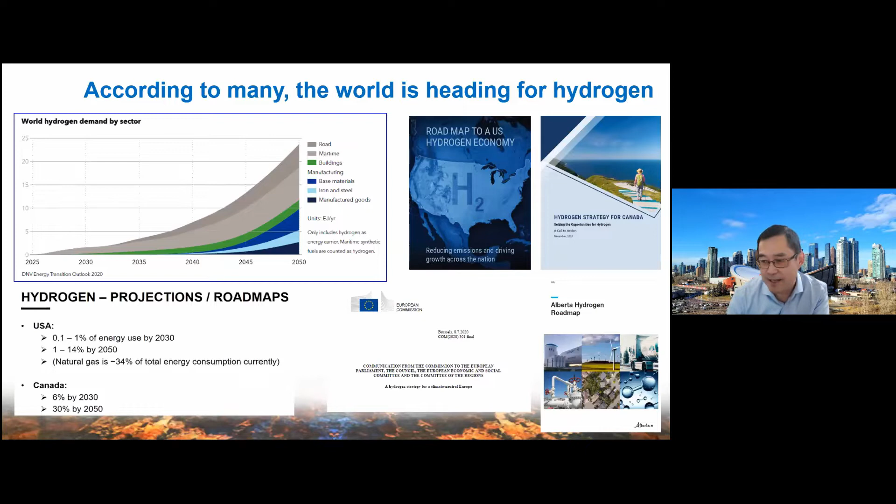I don't want to use lots of time because you can find from the internet lots of different resources, and the world is heading for hydrogen. You can see lots of data in Canada, US, and other countries showing hydrogen production and hydrogen demand are increasing. At the same time, you can also find literature related to governmental hydrogen strategy and hydrogen roadmaps - particularly our province, Alberta, also published a hydrogen roadmap.

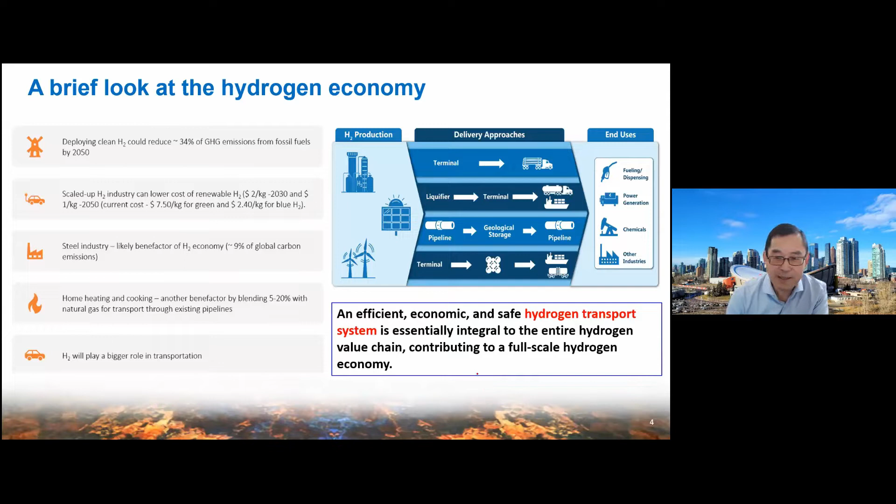In terms of the hydrogen economy, it includes 3 interrelated sections: hydrogen production, hydrogen delivery, and hydrogen use. From this entire value chain, you can see efficient, economic, and safe hydrogen transport is pretty critical to realize the full-scale hydrogen economy. Of course, as a pipeline researcher, we focus on the second stage, hydrogen delivery.

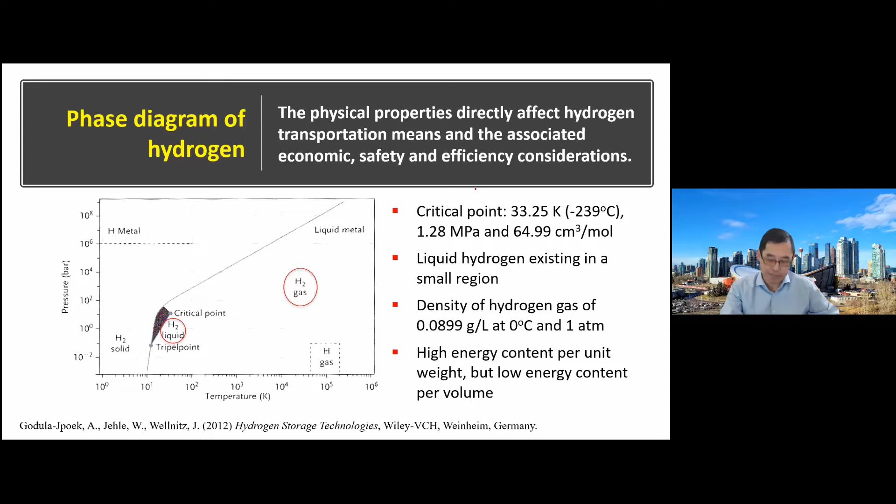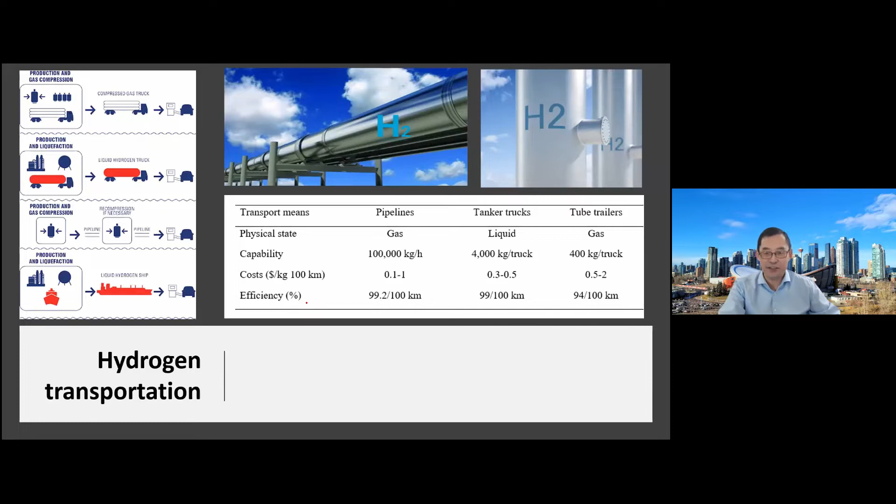Right now hydrogen can be transported by tanker trucks and tube trailers. Of course, it can also be transported by pipelines. This table lists some basic information in terms of cost, capacity, and efficiency, so you can see directly pipelines offer lots of advantages. The US DOE just issued a document stating clearly that transporting hydrogen through existing pipelines is a low-cost option for delivering large volumes of hydrogen.

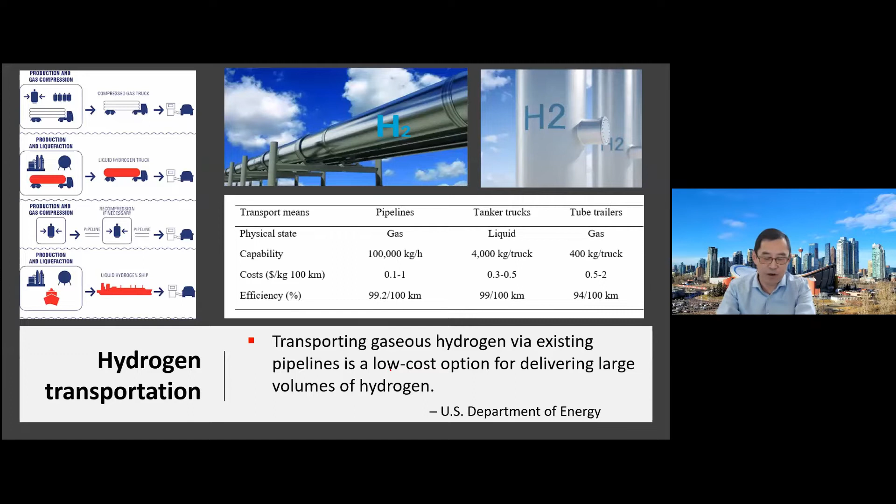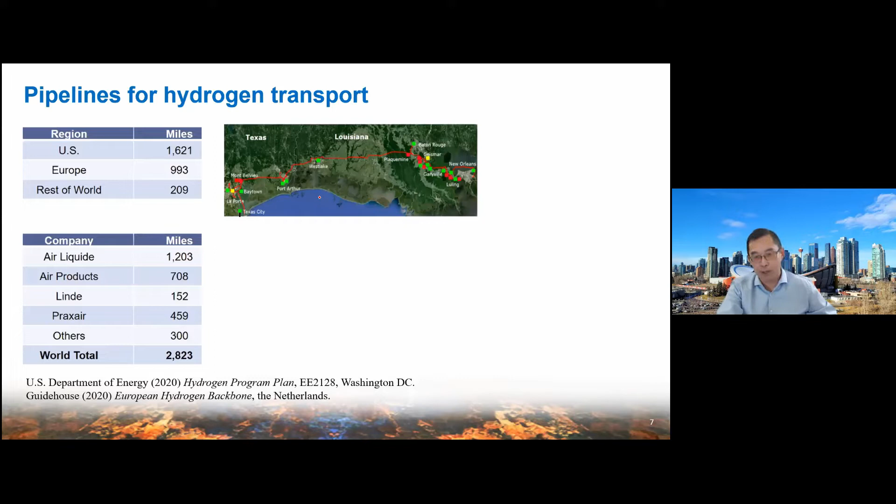Currently there is a very limited mileage of pipelines used for hydrogen service, mostly located in the US and Europe. In the United States, hydrogen pipelines are mainly located in the Gulf area - that's normal because oil production and refineries are located there. In China, there is also a very limited distance of pipelines for hydrogen service.

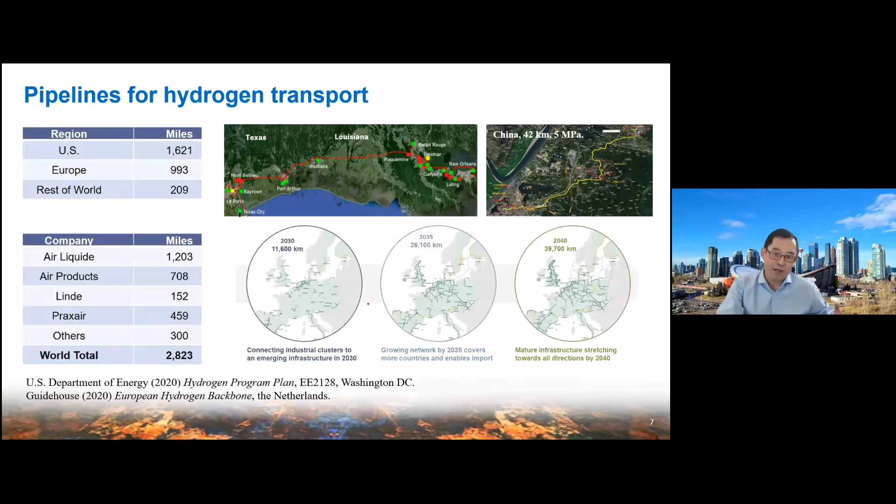But I want to mention the European initiative called the European Hydrogen Backbone, developed in 2020. It's a plan issued to develop over the next 20 years. You can see that in European countries, new pipelines and existing pipelines will be used together to target a well-developed connection across European countries for hydrogen transport.

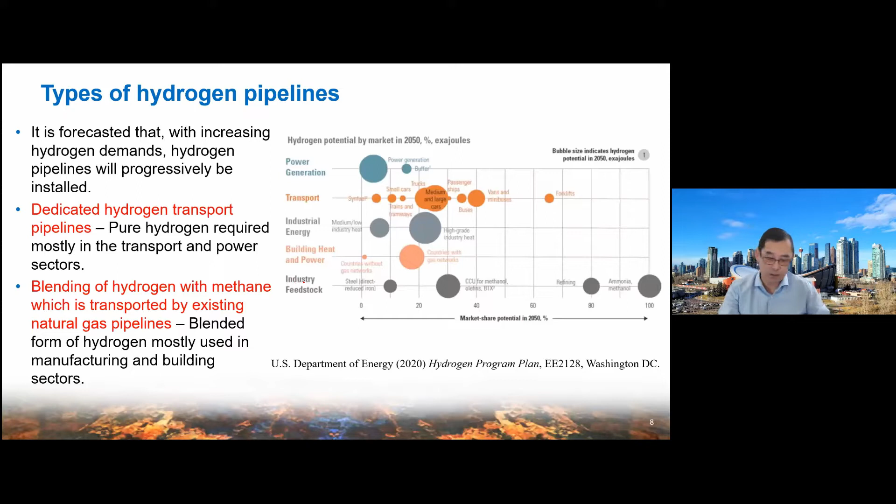But mostly the hydrogen transported by this form is used in industry. If we want to build a new pipeline for dedicated transport of hydrogen, the super high initial capital cost is a major barrier. So the industry and the government tend to use the existing natural gas pipeline to transport hydrogen through blending it with natural gas.

So if we realize this strategy and plan, I summarize 4 areas of technical challenges we have to overcome or address.

First one is the type of materials - whether the material is safe enough to transport the hydrogen and natural gas blending, and what's the optimum operation conditions. Second one is related to the blending operation and some tools - inspection tools, leak detection, something like that.

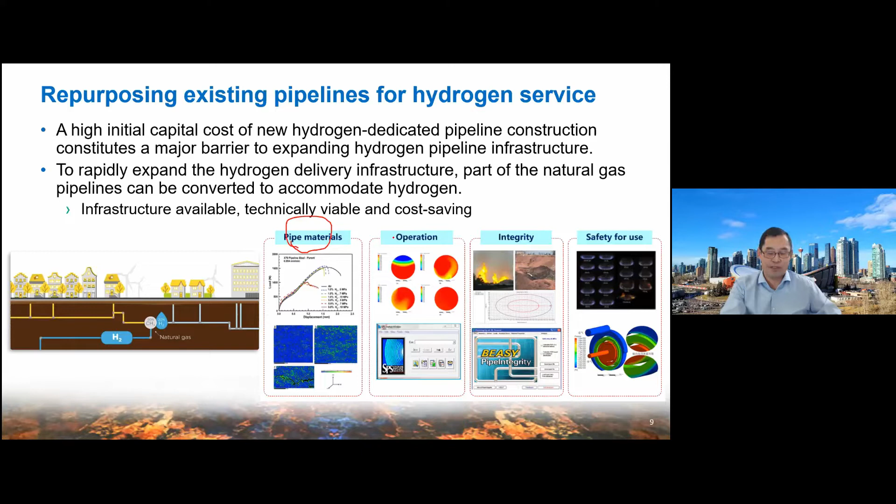Number 3 is integrity - inline inspection tools can be used in hydrogen pipelines without influencing the operation. Finally, is the safety for users. So today I will focus on the first one - pipe materials compatibility with hydrogen transport.

When we read the literature and different reports about steel used in the hydrogen environment, I believe everybody in the meeting room recognizes our problem: hydrogen embrittlement. So what is hydrogen embrittlement? This is a general term referring to the degradation of metals because of hydrogen-metal interaction.

So firstly, I want to give our first highlight in today's talk. Hydrogen embrittlement, the hydrogen means what? That means the hydrogen atom, H, okay? Hydrogen usually can exist in 3 physical forms: hydrogen atom H, hydrogen molecule H2, and hydrogen ions H+. So hydrogen embrittlement means H, the hydrogen atom.

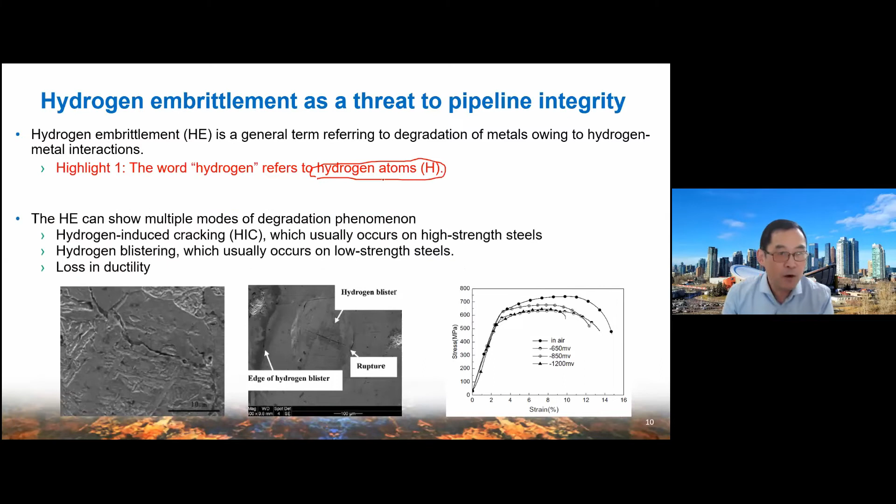After hydrogen embrittlement happens, it usually shows multiple modes of metal degradation. Hydrogen can cause cracking, we call it HIC. You can see the bottom picture on the left side, a sharp crack developed through the metal and can fail the structure. Hydrogen-induced cracking usually happens on high-strength steels.

The second mode is hydrogen blistering. Hydrogen and hydrogen combine together to form hydrogen bubbles, hydrogen gas, increasing the local pressure to cause blistering of the steel. This usually happens on low-strength steels.

Third one is very common, and you can see from the stress-strain curve on the bottom right side, it can cause a loss in ductility and elongation.

Highlight 2 in today's talk: in some literature and reports, a term we call hydrogen attack or hydrogen corrosion is also included in the degradation of metals. But I will emphasize hydrogen attack or hydrogen corrosion does not apply for pipelines, because this phenomenon only happens at temperatures more than 250 degrees. So we don't worry if we use a pipeline to carry hydrogen - this problem will not happen.

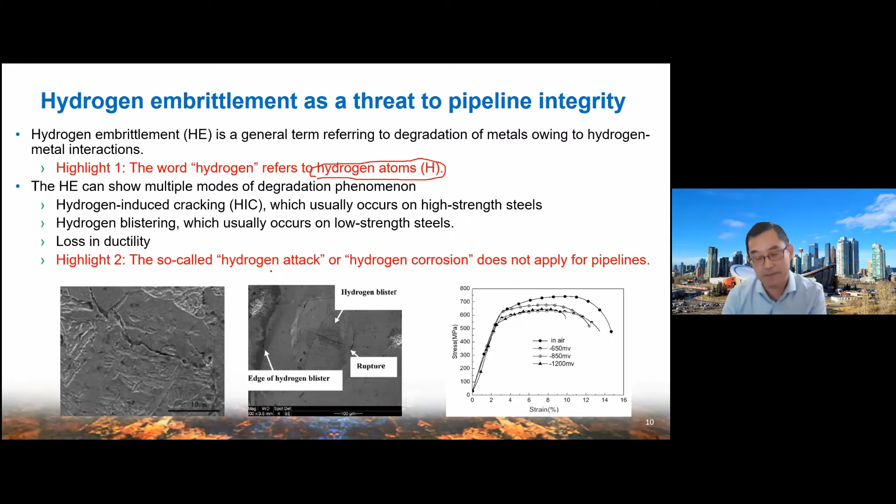Hydrogen-induced cracking is the most dangerous mode of hydrogen embrittlement for engineering structures. The cracks can form internally or from the metal surface, depending on where the hydrogen is located, to reach the cracking condition, and at the same time depends on the environment.

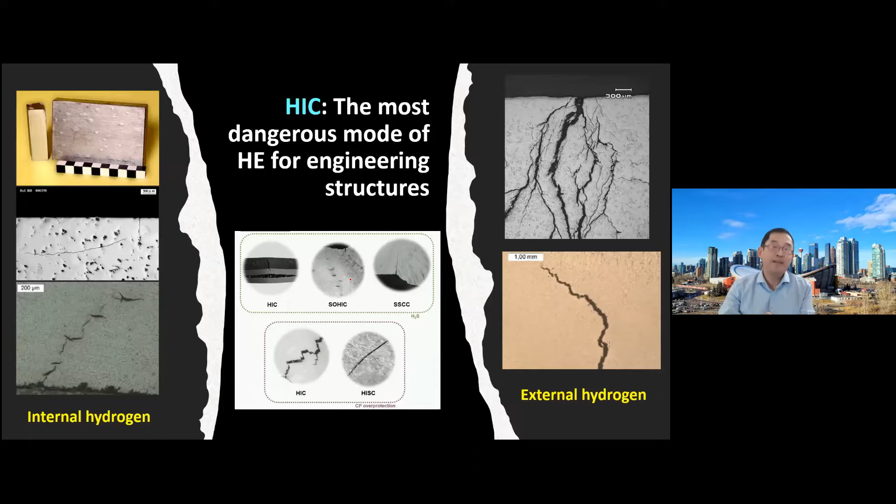H2S availability, or cracks introduced by over cathodic protection - we can also see different features of the cracks related to orientation of the stress or different phenomena of crack growth. There are lots of different terms describing hydrogen-induced cracking, but the common thing is the crack is caused by hydrogen, combined with other conditions I will talk about later.

When we talk about hydrogen-induced cracking of metals such as pipeline steel, please don't forget the pipeline is a welded infrastructure. So hydrogen-induced cracking at the welding area is particularly important. There are 3 reasons.

First one, the pipeline welding area has a unique metallurgical microstructure. You can see from the metallographic picture on the right side, the base steel, the heat affected zone (HAZ), and the welded metal - they have different microstructures. Particularly in the middle one, HAZ, in addition to F which is ferrite, B which is bainite, it also has C which is cementite. This is a hard and brittle phase that can make the hydrogen-induced cracking more sensitive.

At the same time, the welding area also has local high stress concentration. So we just used a model to simulate - at the HAZ, you can see the stress has a peak in this area that's associated with the stress concentration.

Number 3, in the welding area, depending on different conditions, there is always hydrogen accumulation. You can also see from this figure that hydrogen concentration has a peak at the HAZ and the interface between HAZ and the welded metal.

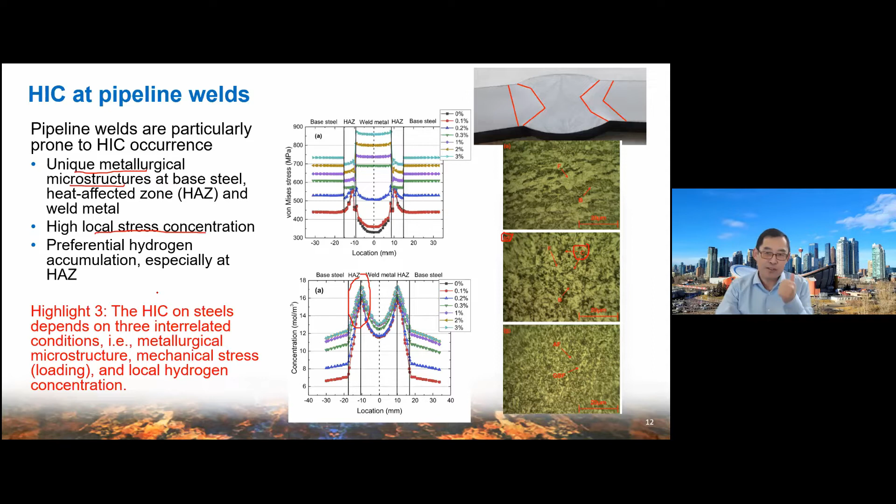So let's come to highlight 3. When hydrogen-induced cracking happens, it depends on 3 conditions: number 1, steel metallurgy; number 2, local stress; number 3, hydrogen concentration. So the welding area has a unique feature in these 3 conditions.

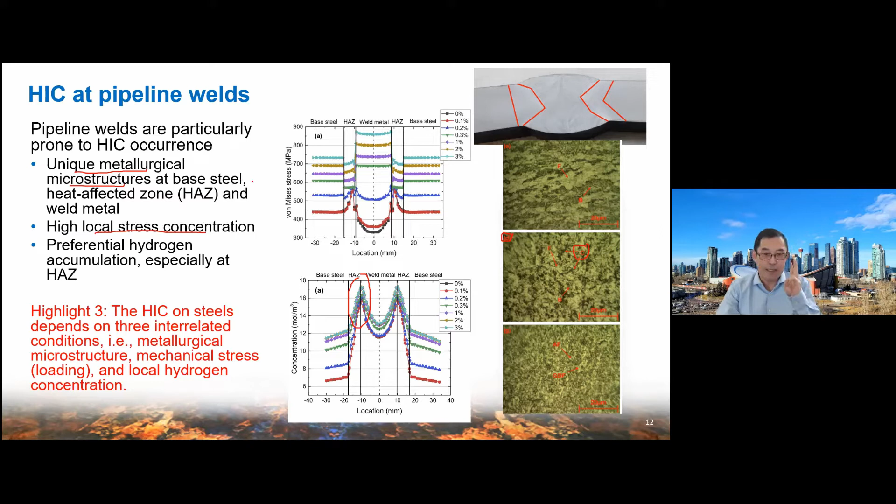So how does hydrogen-induced cracking or hydrogen embrittlement happen on pipeline steel? Usually there are 6 steps. The first one, as I mentioned in the beginning of my talk, hydrogen embrittlement means hydrogen atom induced embrittlement. So the first step is how hydrogen atoms are generated from the environment condition.

After hydrogen atoms are produced, they touch the steel surface. That's the second step, adsorption (ADS). ADS hydrogen will go inside the steel, becoming absorption (ABS) hydrogen - that's number 3. When hydrogen goes into the metal or steel, it tends to diffuse in the crystal lattice of the steel - that's diffusion, number 4.

All steels usually have typical morphological features and mechanical defects, so hydrogen can become trapped - that's step number 5, hydrogen trapping. When the stress, hydrogen, and metal structure meet the condition, finally it can cause cracking. So there are only 6 steps involved to cause cracking of the steel because of hydrogen.

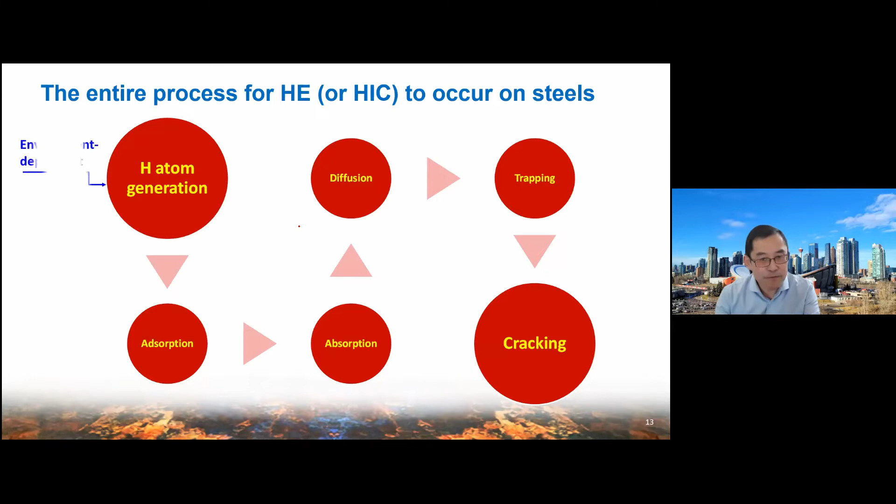Since today's topic focuses on hydrogen pipelines, we need to include the influence of the gas environment. The first 3 steps - hydrogen generation, hydrogen adsorption, and hydrogen absorption - depend on the environment. This means the gas environment and the solution environment will influence the first steps, and consequently, the overall hydrogen embrittlement will be totally different.

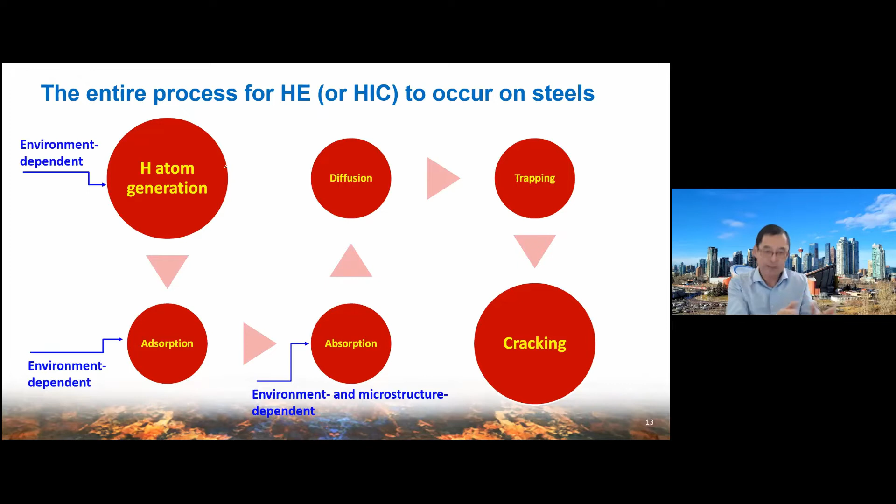If we target the gas phase hydrogen and the solution phase hydrogen, that's why I summarize highlight 4: when we talk about the hydrogen embrittlement problem, we realize the hydrogen atom generation, adsorption, and absorption process will depend on environment. So there are 6 steps for hydrogen embrittlement to happen.

Let's first look at the steps that are identical in both environments - that's the last 3 steps, which are not dependent on the environment. So we'll discuss the last 3 steps first: hydrogen diffusion, hydrogen trapping, and hydrogen-induced cracking.

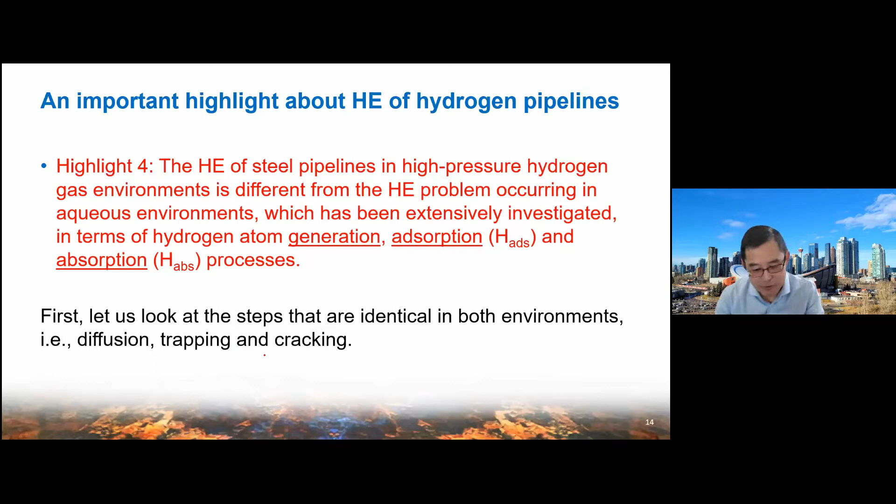I do not want to talk too much about the fundamentals of steel metallurgy and crystalline structure, but we realize that after the hydrogen atom goes into steel, becoming H abs, it tends to locate in the tetrahedral sites, because the steel is mainly combined with Fe atoms, and Fe atoms form spaces between them - this space is typically what we call a void.

The H abs will locate in the tetrahedral sites, surrounded by 4 iron atoms, not 8, based on different energy levels. We have detailed calculations of the energy, but I won't discuss the calculations too much.

After H abs is located in the TS site, this just means a certain steel and certain stress condition have a tolerance to the hydrogen that can be trapped. So not just any amount of hydrogen can cause cracking - for a given steel and certain stress condition, you do not expect a cracking problem if hydrogen goes into the metal, because there is a tolerance of the steel to hydrogen atoms.

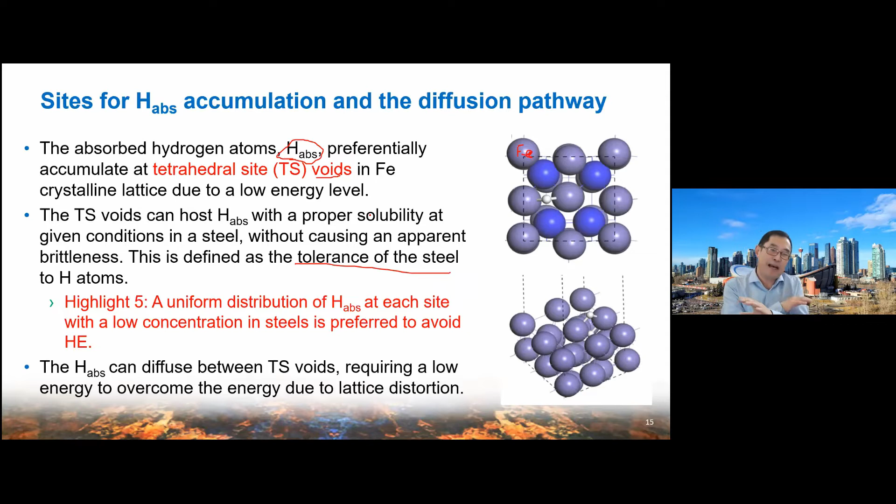At the same time, if hydrogen is trapped at one TS site, it can also diffuse to another TS site. The diffusion between TS sites doesn't need a significant driving force because the hydrogen atom has a small size, and moving from one TS to another usually only causes a little lattice distortion - so the energy barrier is not significant. Hydrogen atoms trapped at TS sites can diffuse freely inside the steel, and if this happens uniformly, we don't worry about hydrogen embrittlement.

Unfortunately, all steels include different types of metallurgical features. These features can trap hydrogen, making it locally concentrated in that area. For example, all steels include lots of dislocations, which are typical linear defects in steel.

The dislocation density can significantly go up if the steel is under stress conditions. At the same time, hydrogen can also be located at grain boundaries, phase boundaries, voids, or other defects. This trapping at these defects can make the local hydrogen concentration much more than the uniform distribution concentration.

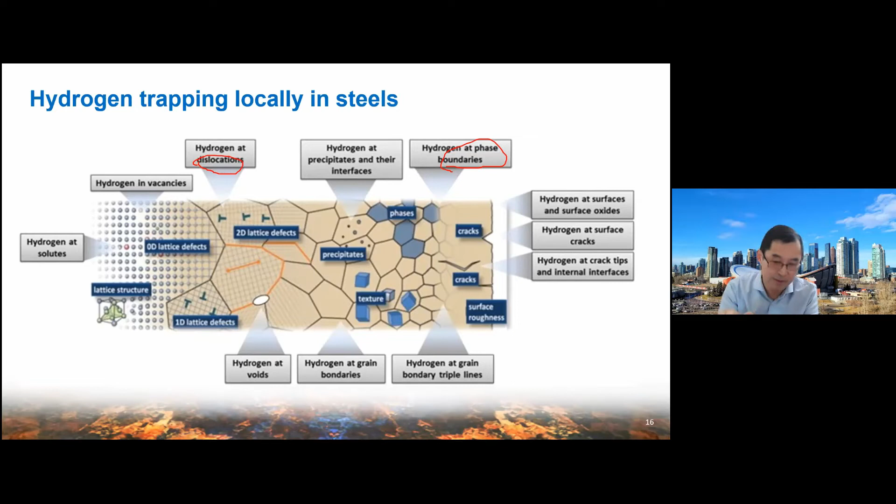So what's the reason hydrogen can be trapped at these metallurgical defects? Basically, there are two mechanisms. First is the electrical field interaction mechanism - hydrogen can neutralize the local electricity at these defects to make the charge balanced. This is a driving force that causes hydrogen to become locally trapped.

The second mechanism is stress field interaction. Local stress concentration can create a little bit more space to host hydrogen. Anyhow, these are the two basic mechanisms by which hydrogen can become trapped, depending on the trapping energy level.

In steel, there are two types of hydrogen traps. One we call reversible - this means the hydrogen gets trapped but is also very easy to leave these traps. For example, dislocations or low angle grain boundaries are reversible traps.

The other type is irreversible, meaning the hydrogen bonding energy is significant. When hydrogen is trapped in this location, it's not easy for it to leave. For example, non-metallic inclusions or high angle grain boundaries are irreversible traps.

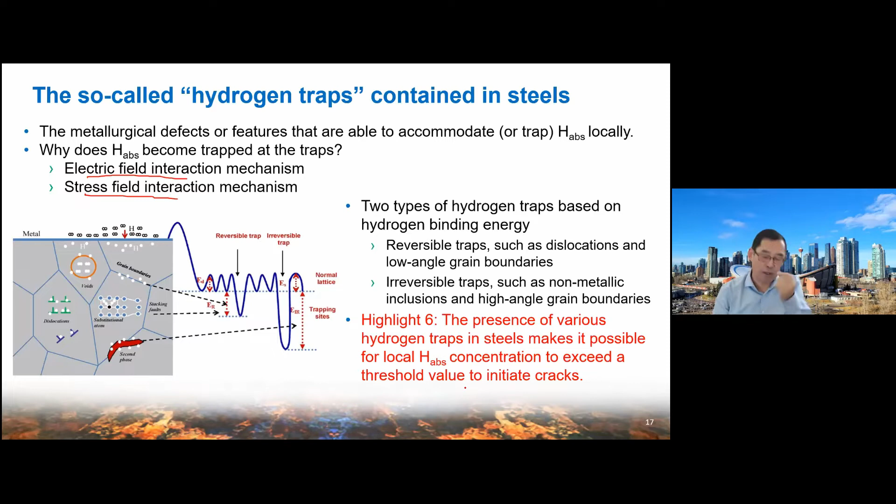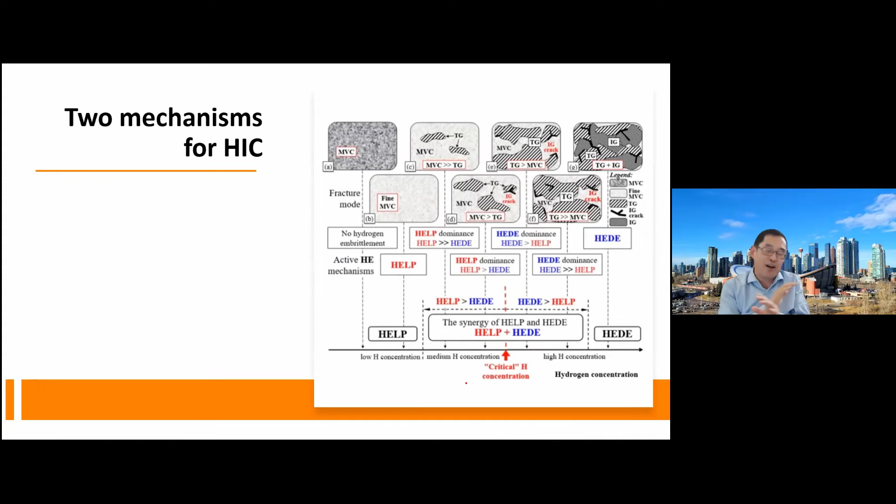So why does hydrogen reaching a certain concentration cause cracking of the steel? Of course, if you're interested in reviewing the mechanism, there are many documents. Due to time constraints, I won't give a comprehensive review of hydrogen-induced cracking fundamentals, but basically there are two widely accepted mechanisms. The first is hydrogen-enhanced decohesion, HEDE. Hydrogen atoms can decrease the bonding strength between iron atoms, eventually causing the steel to break.

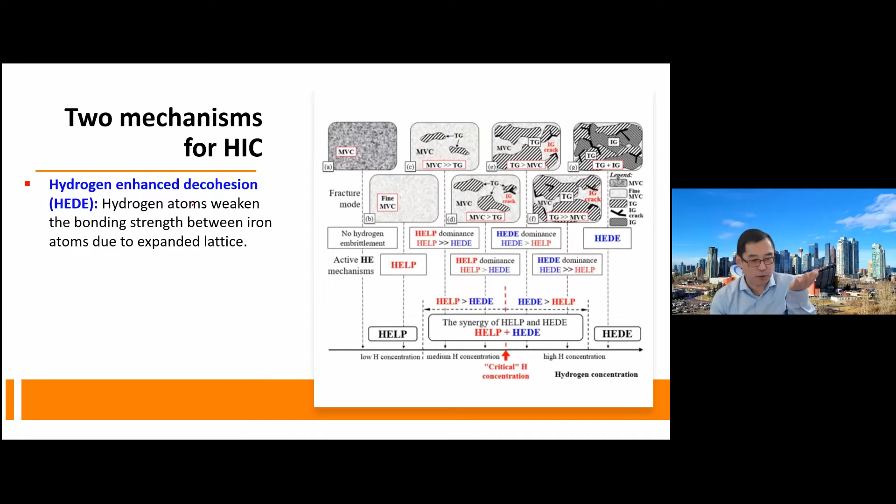If the HEDE mechanism is followed, it can cause brittle cracking of the steel, and usually hydrogen makes the steel harder, increasing its mechanical strength. That's the first mechanism, very quickly.

The second one is hydrogen-enhanced local plasticity, HELP. This mechanism means the hydrogen atom combines with internal dislocations, increasing dislocation mobility. If this mechanism applies, the steel usually becomes soft, and you can measure a decreased yielding strength. So if HELP applies, the cracking usually has a ductile feature.

Both mechanisms are widely accepted and applied to explain the HIC phenomenon. I won't give too much detail, but using the graph on the right side - whether HEDE or HELP applies actually depends on hydrogen concentration. Low hydrogen concentration usually follows the HELP mechanism, making the steel soft. But if there's too much hydrogen in the steel, that's the HEDE mechanism, making the steel harder and causing brittle fracture. I'll quickly skip these slides and go to the next one, since I have so many slides for today's talk.

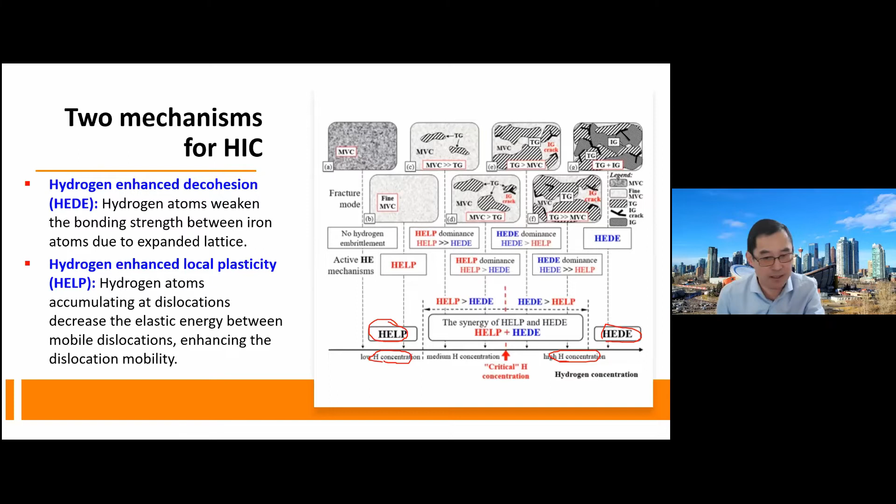When we talk about hydrogen permeation into steel, that means the H goes into the steel, not H2. Then next, it depends on the environment, whether it's solution-based or gas-based. I'll use 2 examples to explain how different the environment will influence hydrogen generation.

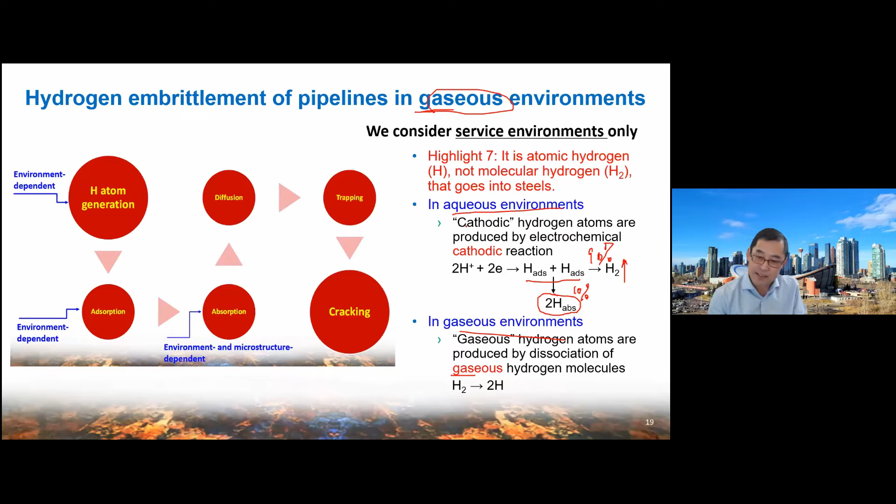For the gas phase environment, the hydrogen will decompose from the H2 because we carry the hydrogen gas, H2. Decomposition of H2 produces H, then the H will go into the steel. So you can say the generation of hydrogen atom is totally different. The second one,

for given hydrogen pipelining conditions, in addition to pressure and temperature, we also need to pay attention to the composition of the gas fluid, especially for hydrogen and natural gas blends.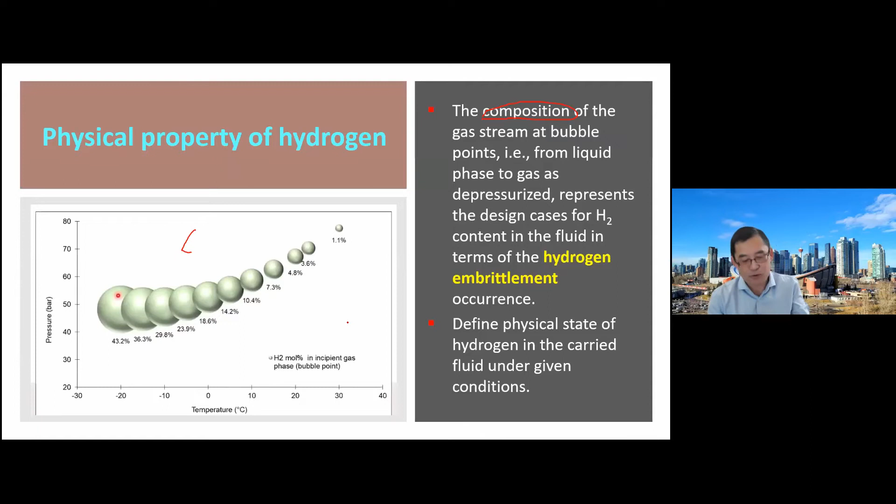So from this graph, the top is liquid, the bottom is gas. For hydrogen embrittlement to happen, the source must be hydrogen gas. So if you want to evaluate whether a hydrogen embrittlement problem will happen, firstly you need to think about pressure, temperature, and composition to determine if hydrogen gas is available in your system. This is the first condition you consider for the hydrogen embrittlement problem.

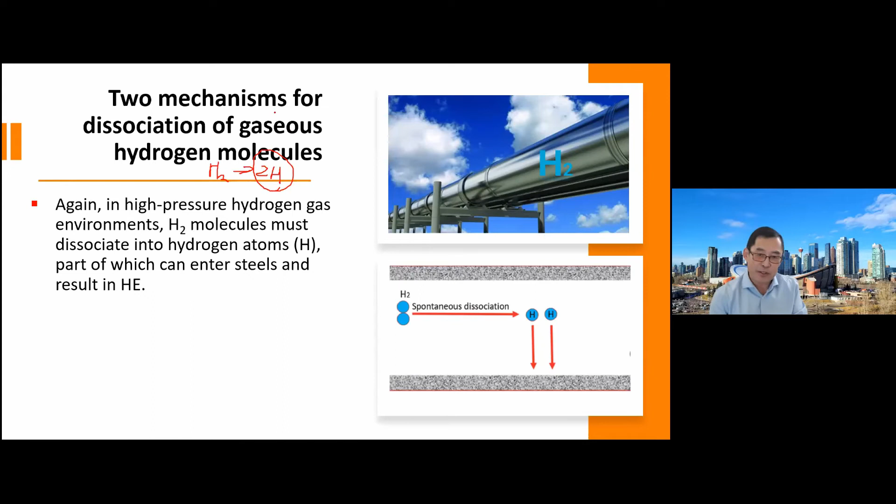So if your assessment tells you hydrogen is present in the gas phase, then as I mentioned, for hydrogen to go into the steel from the gas phase, the step must be H2 decomposed into H. This is a very critical condition for hydrogen atom generation. Then, under the pipelining condition, you need to check if this reaction will really happen.

So you need to do an assessment. In general, from the gas phase H2 changing into atomic hydrogen H, there are 2 mechanisms. First is spontaneous dissociation - H2 carried in the pipeline will, under the given condition, automatically decompose into H. Second is dissociative adsorption - the H2 will diffuse towards the steel surface, and at the surface of the steel it will decompose into H.

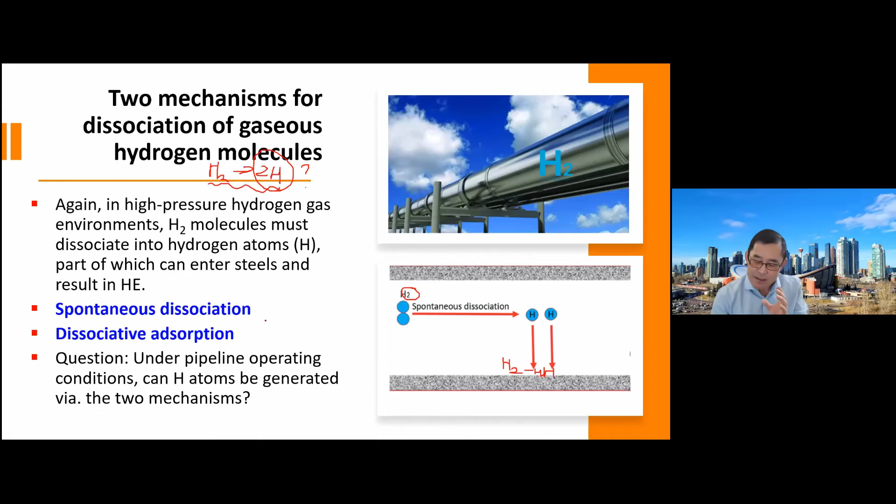So if you want to assess whether hydrogen embrittlement is a problem, you need to critically evaluate whether these two mechanisms can happen under the pipeline conditions.

Let's look at the spontaneous dissociation mechanism first. Based on the free energy change calculation, we found that for spontaneous dissociation under all possible pipelining conditions, this mechanism is not thermodynamically possible. So that means for hydrogen gas pipelines, you don't need to worry - spontaneous dissociation will never happen under pipelining conditions.

The second mechanism is dissociative adsorption, and from the free energy change under pipeline operation conditions, this delta G, the free energy change, is negative. That means a negative free energy change for this mechanism means it's really possible thermodynamically to generate a hydrogen atom, but you need to include the influence of temperature, pressure, and composition, particularly the methane percentage. Then you calculate the free energy change and determine whether it's thermodynamically possible or not. Our calculation proves this mechanism can make hydrogen atom generation happen, and hydrogen atoms go into the steel.

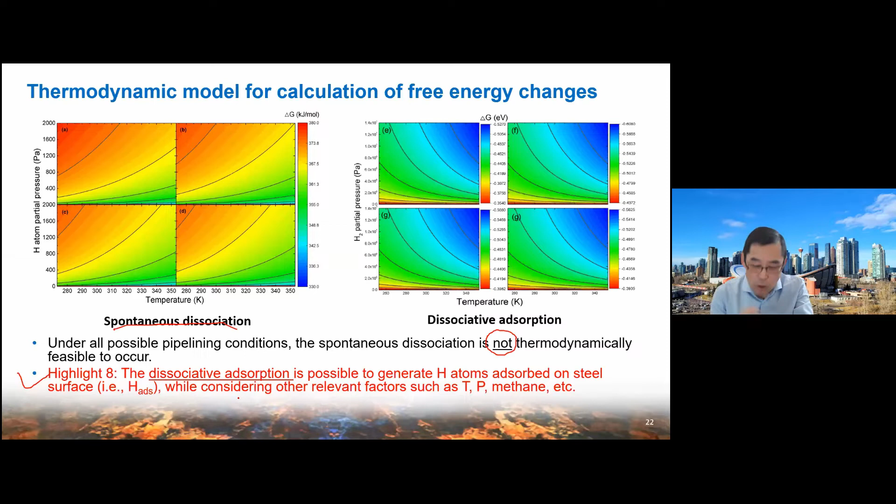After hydrogen is generated by the second mechanism, the next step is it will go into the steel from the outside surface to the inside surface. This process also depends on the environment.

If the hydrogen is what we call cathodic hydrogen, meaning hydrogen produced from the solution phase, this kind of hydrogen usually has a high driving force because cathodic hydrogen is produced by cathodic reaction. The concentration of hydrogen is usually much more than gas phase hydrogen. The driving force is much more significant, which can make hydrogen quickly go into the steel and take all the potential sites for hydrogen accumulation.

But as a comparison, if the hydrogen atom is produced from the gas phase, the amount of gas hydrogen usually is limited. So sometimes the adsorption hydrogen to absorption hydrogen process is also reversible - it can go inside or go outside.

After hydrogen goes into the steel, it tends to occupy the lattice voids first. After the voids become saturated, hydrogen is concentrated in other hydrogen traps, such as dislocations, grain boundaries, something like that.

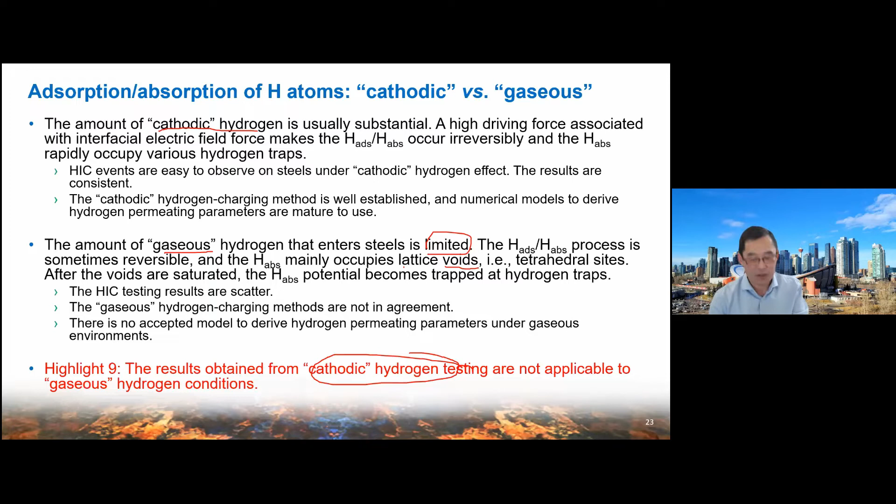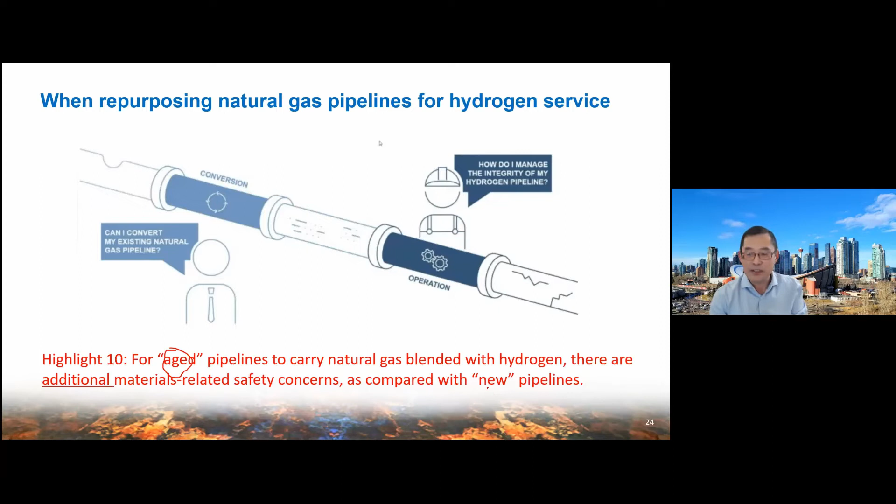After hydrogen goes into the steel from the gas phase - I need to speed up a little bit - when we use existing aged pipelines to carry hydrogen, you have to realize there are additional materials-related challenges compared with building a new pipeline. So what are these new additional challenges?

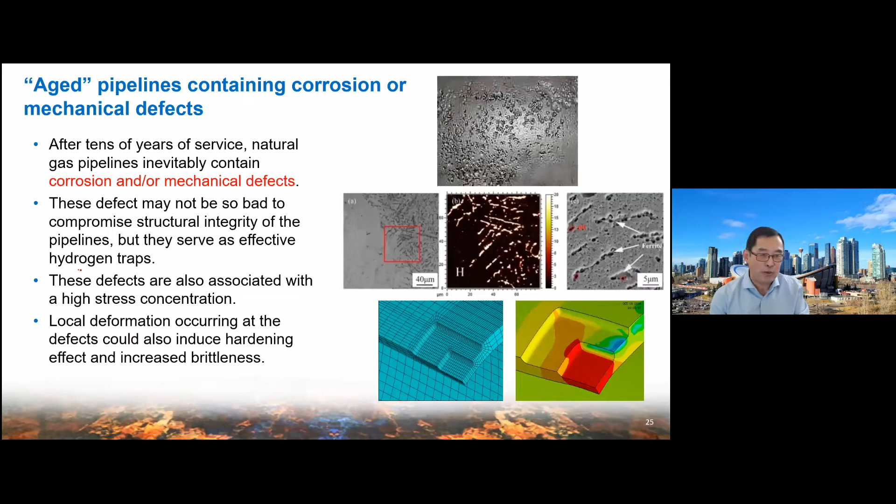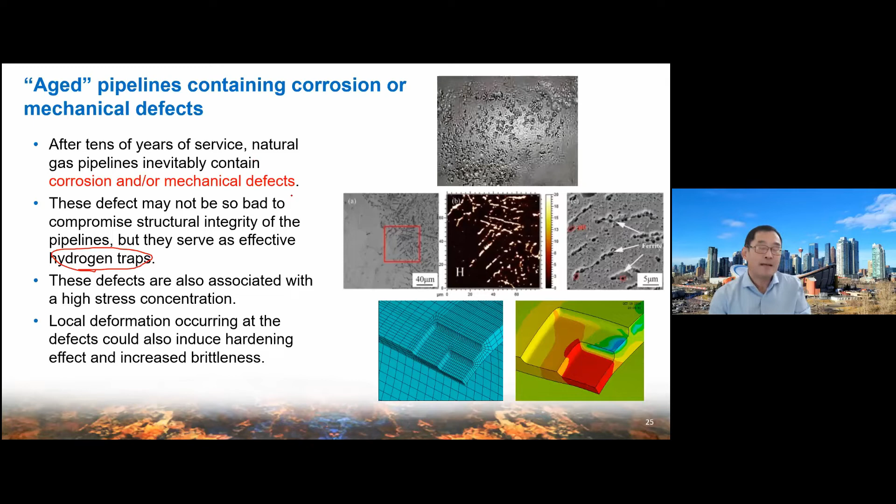First, after a pipeline is serviced in the field for many years, there must be some loss from corrosion and mechanical defects. These defects probably aren't so bad in terms of pipeline integrity - the pipeline can tolerate this kind of corrosion or mechanical defects and still be operating. However, these defects are very effective hydrogen traps. So for aged pipelines, hydrogen can become concentrated at corrosion sites and mechanical damage sites, such as dents and other metal loss sites. These sites can accumulate high hydrogen levels, causing hydrogen embrittlement. That's the first extra challenge.

The second extra challenge: after a pipeline is operated for many years, especially in geotechnically unstable areas - for Canadian pipelines operated in mountain areas, in Arctic areas - pipe-soil interaction can produce significant strain on the pipe. From previous research, we find that prestrained pipe steel will more easily attract hydrogen in the steel. That's why prestrain can increase the sensitivity of aged pipelines to hydrogen embrittlement. That's the second additional challenge.

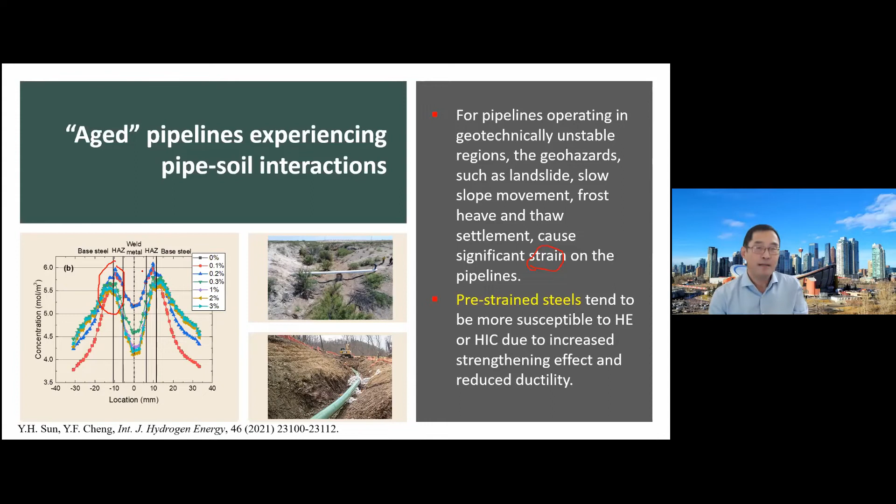That gives us a very critical question: if hydrogen interacts with fatigue cracking, how can you quantify the interaction in terms of crack propagation? This is a major knowledge gap in this topic because we do not have much research in this area. So that's number three.

Number four: for aged pipelines used for hydrogen transport, how will impurity gas influence hydrogen embrittlement, particularly methane, CH4? Our research proves that if CH4 is available, it will compete with hydrogen in terms of adsorption on the steel surface, but the bonding energy of methane compared with hydrogen adsorption energy will be different. This energy difference depends on temperature and the percentage of hydrogen and methane, and finally influences how much hydrogen will compete with methane touching the steel surface and going into the steel. This requires modeling to quantify the competition effect of methane with hydrogen permeation. That's the first impurity gas.

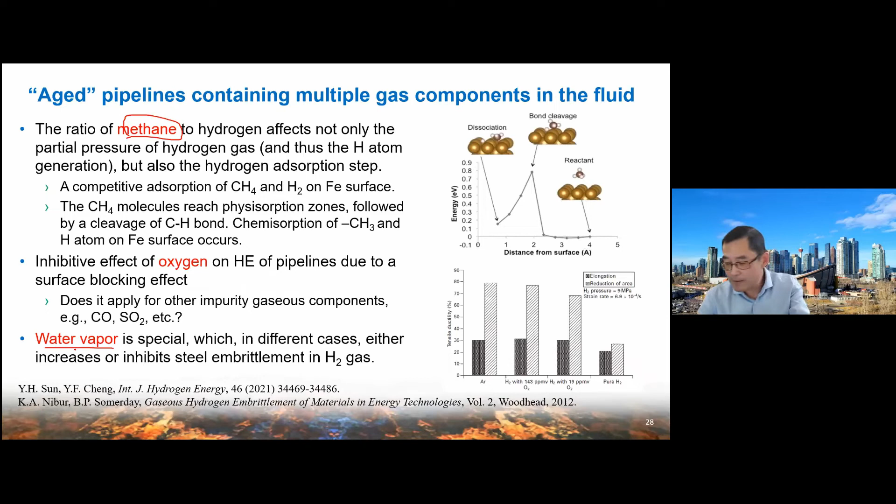Okay, so to conclude my today's talk, I want to use two important lists to talk about. To summarize my talk today, if we want to convert existing pipelines for hydrogen service, in order to meet industry needs, we need to develop a technical assessment program.

This program has lots of things we need to include, and I'll quickly go through the assessment list. We need to evaluate the possibility of molecular hydrogen generating hydrogen atoms under pipeline conditions.

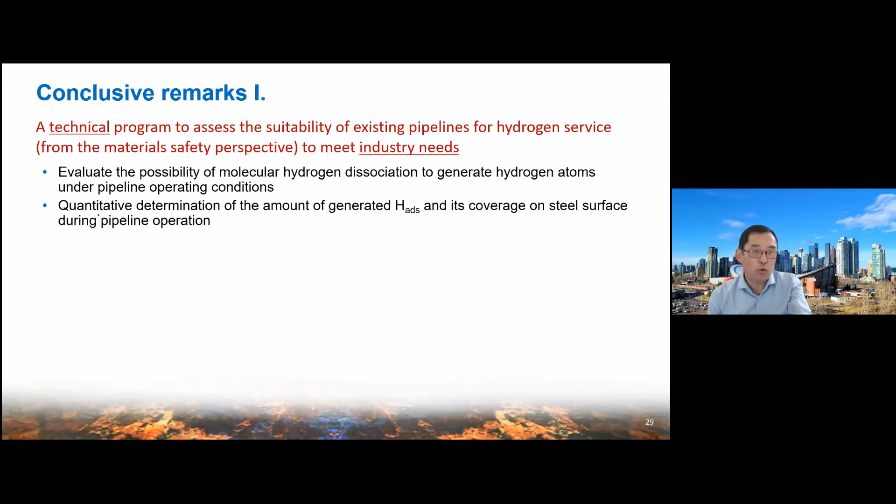We need to quantitatively determine how much hydrogen will be generated and cover the steel surface, and how much hydrogen goes from the outside steel to the inside steel. What is the diffusion and trapping behavior of hydrogen in the aged pipe steel?

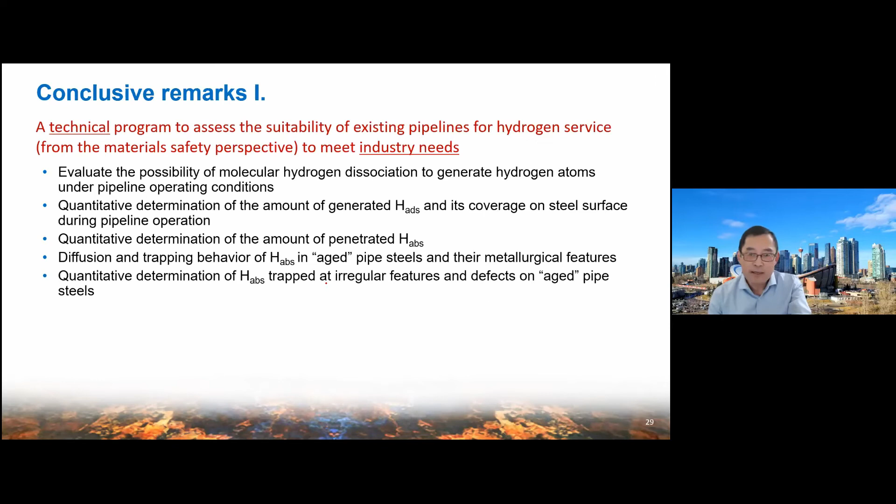This is in terms of the steel metallurgy features. At the same time, the aged steel also has corrosion and other defects that can serve as hydrogen trapping sites.

Next, what is the threshold value of hydrogen concentration to cause a crack, as with metallurgical traps and corrosion and mechanical traps? This particularly applies to aged pipelines.

Next, what is the interaction between hydrogen and fatigue? And how can we assess the influence of pre-strain due to pipe-soil interaction in terms of HIC? This is very, very important.

This problem also applies to the pipeline welding area. Finally, based on all of this, the assessment program is supposed to tell the industry what is the optimal operating condition to transport hydrogen and avoid the HE problem. So that's from the industry needs perspective.

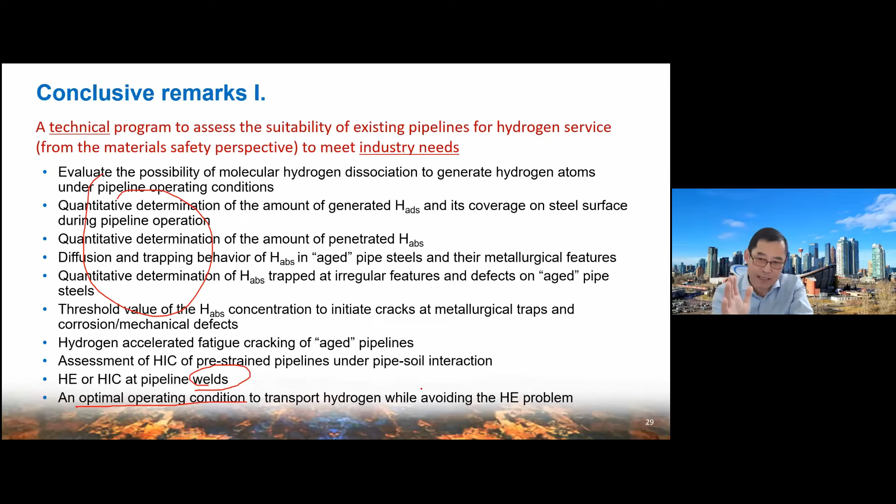Because we have so many gaps, I also listed lots of things in terms of filling the knowledge gap. For example, what's the thermodynamic model to calculate the free energy change and hydrogen molecule dissociation? This one we have developed.

What's the mechanism for the competition between methane and other impurity gases? This one is partially developed, but not yet finished.

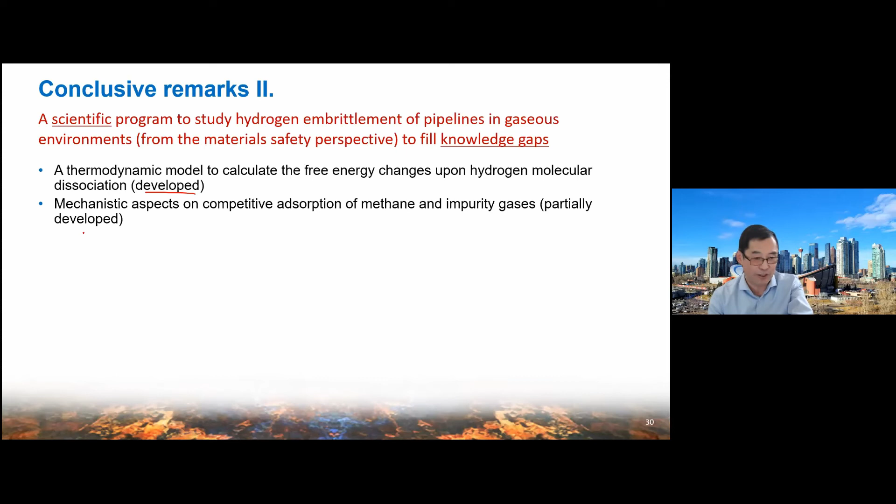What is the standard well-accepted method for hydrogen charging in the gas phase environment? This one is yet to be developed. This is a very important gap to be filled.

Next, the metallurgical microstructure for the aged pipeline. There's a lot of literature giving information on the steel metallurgy of old pipe steel.

Influence of corrosion and mechanical defects on hydrogen trapping — this one is a gap to be filled.

The synergistic effect of steel metallurgy, local stress, and hydrogen on crack initiation — there is a lot of experience in this area, but this knowledge needs to consider the real practical conditions to give new recommendations.

Next, hydrogen atom in fatigue crack — this is a knowledge gap to be filled.

Influence of pre-strain on hydrogen permeation, trapping, and cracking — this is developed, and we have researched this topic.

And fundamentals of welding metallurgy and HIC — there is also extensive literature and research in this area.

Okay, last but not least, one minute: selection of pipe steel based on mechanical strength will unfortunately never be successful in avoiding hydrogen embrittlement, because, as you saw from today's talk, hydrogen embrittlement actually depends on 3 conditions — mechanical property is just one of them.

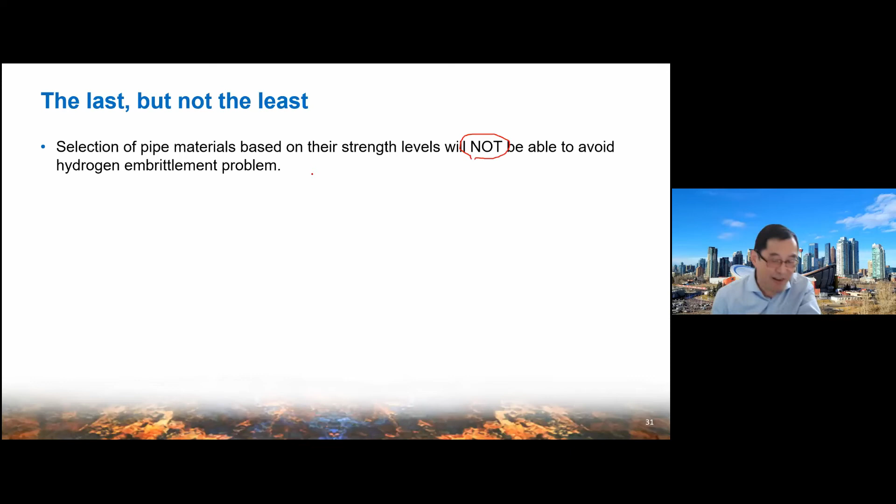I know some standards give recommendations like, if you carry hydrogen, select this grade of pipe steel. Unfortunately, I will not agree. So that's the last but not least point.

That's the first thing. Second, hydrogen embrittlement will happen under 3 conditions. This talk supports that understanding.

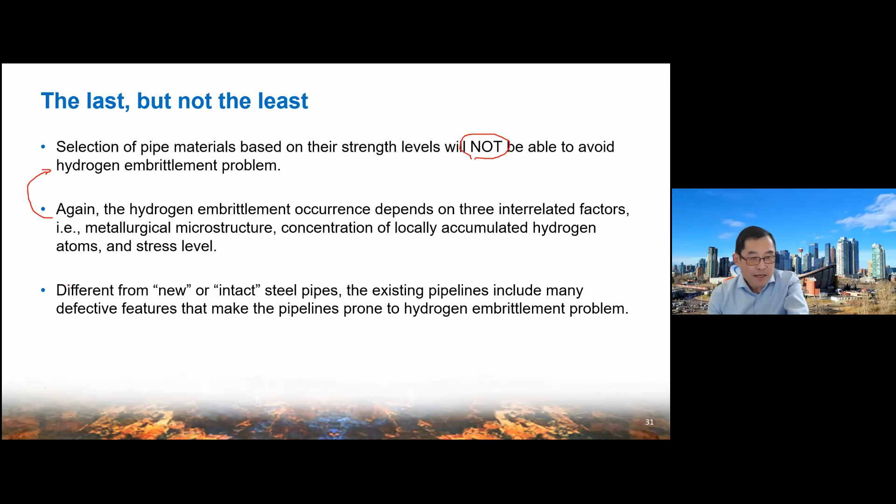Different from new or intact pipe steel, existing pipelines have so many defective features that can make them more susceptible to hydrogen embrittlement problems. So this must be evaluated.

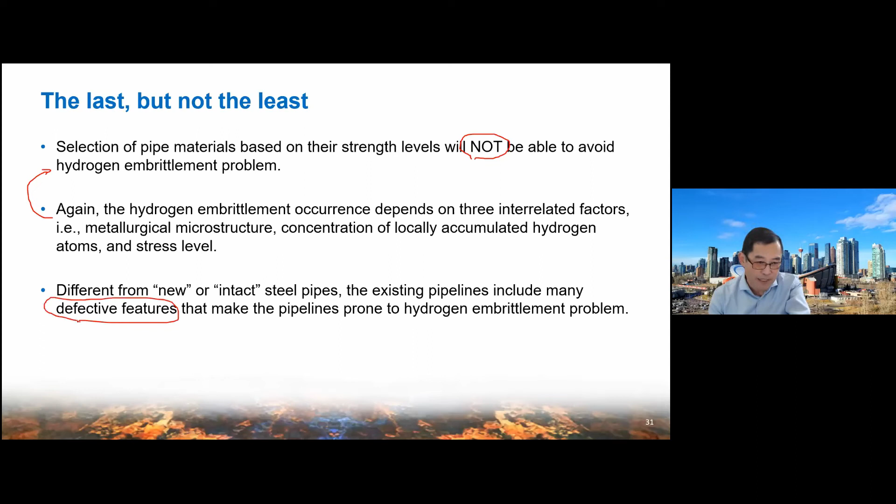Finally, an assessment program must be developed based on the different aspects included in today's talk. Then we can have an overall and confident conclusion regarding the suitability of the existing pipeline for hydrogen service. So that's the end of my talk.